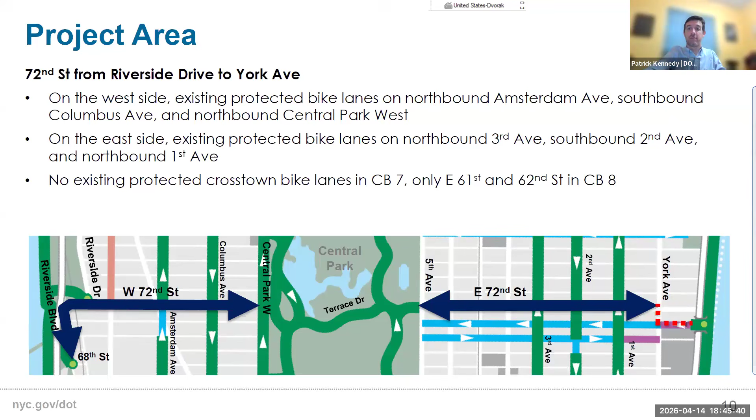Looking specifically at the west side, this is the part of 72nd we'll be talking about tonight. Some of you may have already noticed, but this proposal also includes a bit of Riverside Boulevard down to West 68th Street, as well as the entirety of West 72nd Street.

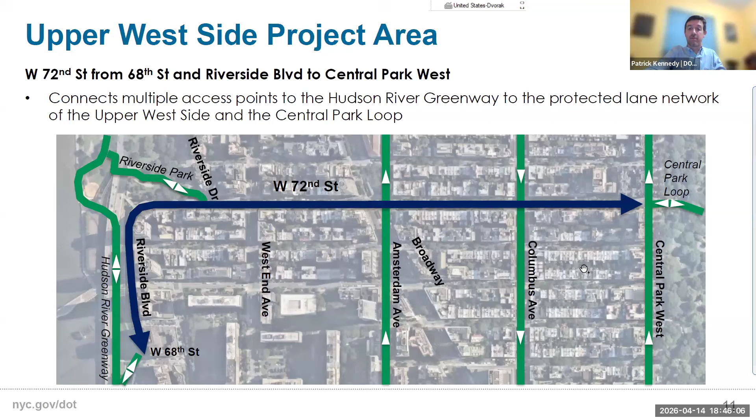Moving to existing conditions: shifting to West 72nd specifically, this street links cyclists from the Hudson River Greenway to Central Park and the Upper West Side. We have existing north-south protected bike lanes on Amsterdam Avenue, Columbus Avenue, and Central Park West. There's also a fair amount of commercial activity and double parking on much of the corridor.

The street is a two-way, 60-foot wide street with 2 lanes in each direction, and parking on both sides. There are 3 bus lines on the street—mostly the M72, but the M5 and M57 run on a couple of blocks on the western end. We have loading and drop-off needs distributed throughout the corridor, with both residential and commercial needs making up that loading and curbside access demand.

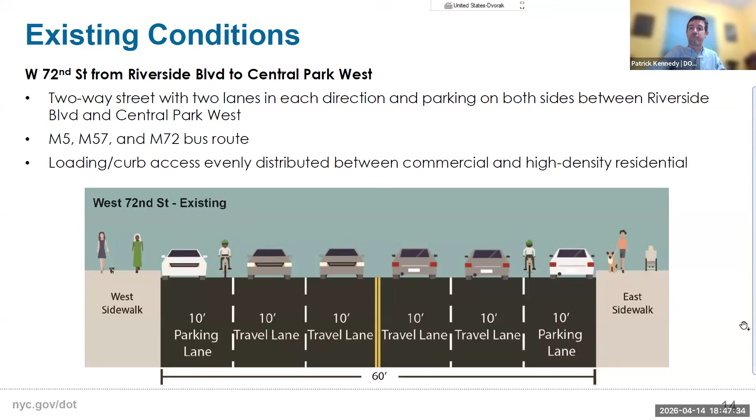On Riverside Boulevard, the smaller part of this proposal, it's a narrower street, about 44 feet wide, 1 lane in each direction, parking on both sides, flush median in the middle. It connects to Riverside Park, from Riverside Park to 68th Street, going down via a ramp to Riverside Park in the Greenway, with high density residential on the east side of the street.

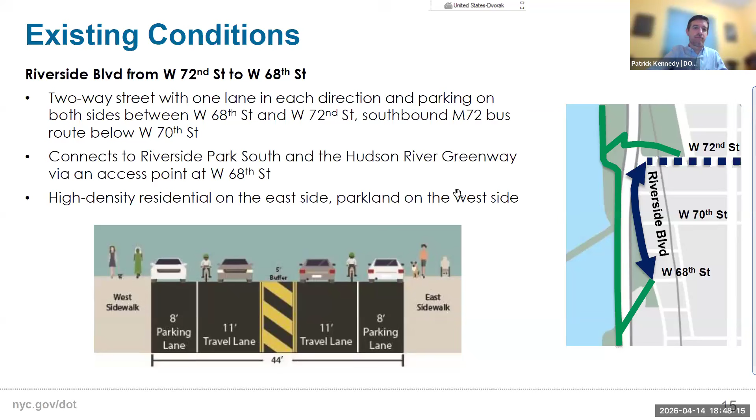So moving to the proposal.

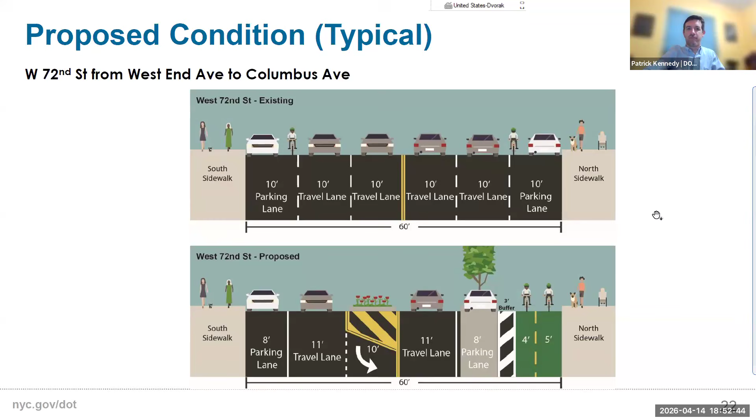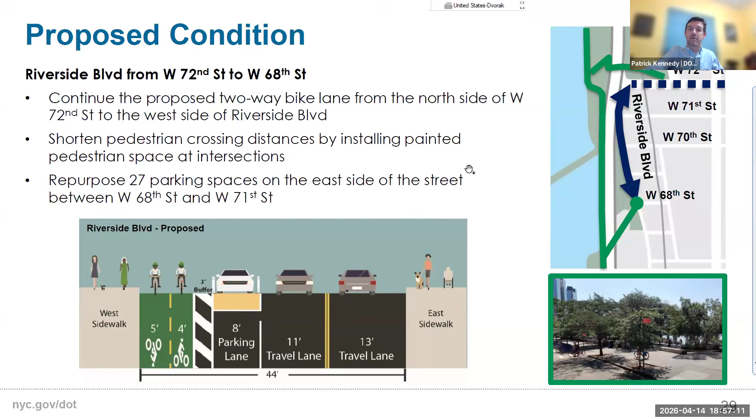And here's what that design looks like on the existing and proposed: a 2-way lane on the west, floating parking, pedestrian space, and then retaining the 2 directions of travel.

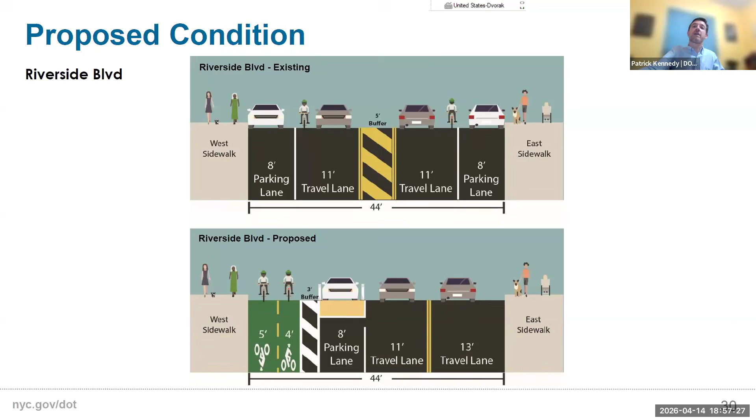So now on to making it work.

As I said earlier, we have enough capacity on the roadway to remove 1 lane in each direction. There's actually not a whole lot of volume on West 72nd, but something that we'll have to contend with and account for is the frequent double parking that we've observed on 72nd Street.

So something that we did in advance was use our public engagement team to talk to people on 72nd about how they use the street. We talked to a total of 89 businesses and got decent participation in a survey, about 70. And we learned what shouldn't surprise most people.

We learned that there are a lot of deliveries happening on the street, both inbound and outbound. People are getting deliveries, and they're also sending them out. Also, most people observed frequent double parking on the corridor.

We also visited residences, mostly talking to building staff. We did a survey, didn't really get great participation, but we had conversations with people and were able to confirm a lot of similar parking needs. This would be more for building services, utilities, deliveries, or for-hire vehicles. So different purpose, but same need for curb access and turnover.

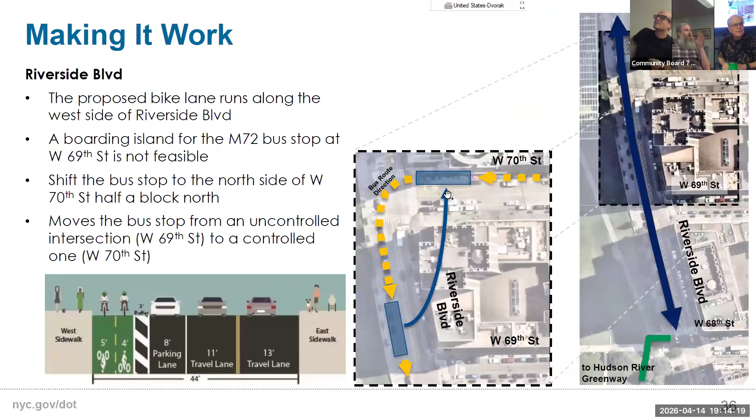Jay, is it possible to get one of the slides? Ask Patrick to come back up. Which one, number 26? Can you put up number 26? I apologize, it's for my own short memory, I want to make sure I'm seeing it. Is it sharing now? Yes, 26 you say? Yeah, I believe it. Nope, it was the one that showed all six lanes, the proposed six lanes. This one? No, it was a rendering. Yeah, that'll do it. Sorry. This one or no? Yes, that's it.

Just a couple, you answered some of my questions. I had noted several organizations, institutions, advocacy groups, business groups, that I would have expected you to have consulted about this, and you did a fairly comprehensive job, so that question goes down the tubes.

I guess my question is, can you paint a more detailed picture of what the traffic flow is likely to look like with one travel lane in each direction, fair, consistent double parking activity, where personally I don't think signage is going to be the answer. I envision one travel lane with double parking occurring on a regular basis, with bus traffic in that lane. In essence, it sounds like a simplistic question, but where does the traffic go under those circumstances? Or, as it is often on 96th Street, it goes nowhere.

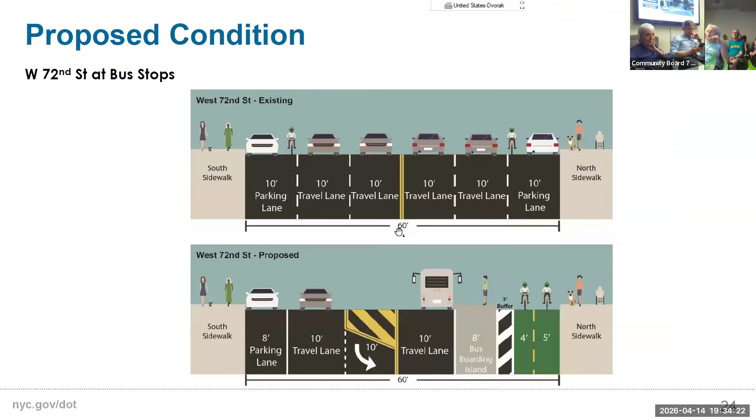So I'm going to turn this into a question. My question is how you have accounted for the fact that cyclists who want to go into the park and don't want to go south, but rather go north or into the park - how are you going to keep them from careening across and going on that pedestrian path, particularly in the next two years when they can't even enter at 79th Street? I think it's a good solution for southbound cyclists, but I haven't heard anything about how you are accounting for northbound cyclists.

And just so I understand, you're talking about at Riverside Drive, the path that goes through the park. I think what you're pointing to looks like this shared path. It's not that wide. There's a dog run just right over there.

Yeah, so with that, I mean, we probably - people who are headed north will continue to take that path through the park. It's an existing path. It's the current way that people get to and from 72nd Street for the most part.

We're hoping that even with the less direct route, just the fact that it's not as steep a hill for people, that they will start to prioritize or favor the entrance at 68th Street. But we believe both entrances have their purpose, and we're trying to encourage people to go to 68th Street, though there is an existing entrance at Riverside Drive that would still be maintained. It would still be there.

If I could just have one quick follow-up question. We're already over, that's all, ten minutes over. I'm so sorry. We can do it during comments discussion then. Okay, thank you. We have one person online, board member Barbara. Did you want to ask anything? I think we're already over.

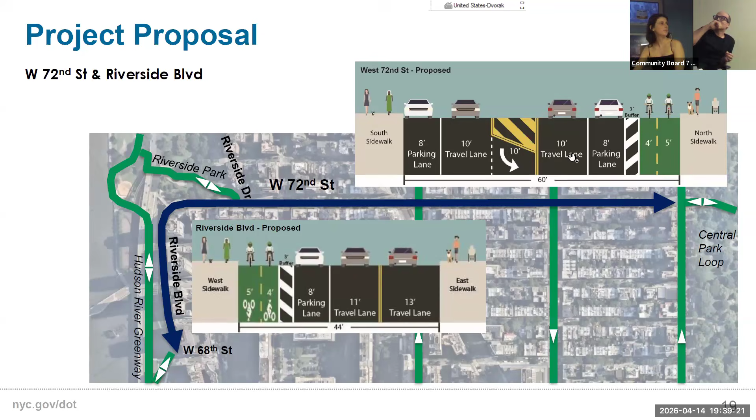Lester Wasserman, Tip Top Shoes, Tip Top Kids, West NYC, live on 72nd Street. I own a building on 72nd Street. Every day we get FedEx and UPS. Those deliveries take approximately 40 to 60 minutes apiece. They come in the morning twice, they come in the evening twice. That's 4 hours a day that one lane is completely blocked. That's just my store. I have a gentleman here from Acker Merrall - I'm sure he's in a similar situation. One lane turns into no lanes very, very fast. If God forbid I were to suffer a medical emergency, or one of these seniors, how would an ambulance possibly navigate this to get through to save a life? We are totally stifling and bottlenecking 72nd Street, turning what was a main street into a non-issue. I don't know how this is even a thought, because the ramifications could potentially be deadly. We're talking about seniors getting education, but no one's talking about the e-bikes and the delivery guys that are reckless, that just fly through. Time's up.

Hi, my name's Cliff. I work at Acker Wines. We've been on 72nd Street since '86. I've been there since '96. I've seen this neighborhood change, I've seen everything go. We handle 500 to 1,000 cases of wine in and out of our doors every single week. We have 5 full-time delivery drivers - if we can't make deliveries, they all lose their job. At this point, this is so negative toward business and toward people who've been pillars in the community. We've made so many donations to local schools and everything else. This is going to force us to move. This is not even palatable for us. We've been here since before most of you guys, so I don't know what you're thinking about. There's not a single voice for the community and the business on this committee, and we're the ones bringing all the people to the street. We're the largest wine auction house in the world - we have offices in Hong Kong, London, and Switzerland, and customers who come to our one showroom in the entire world on 72nd Street. This is going to eliminate all of that. Thank you.

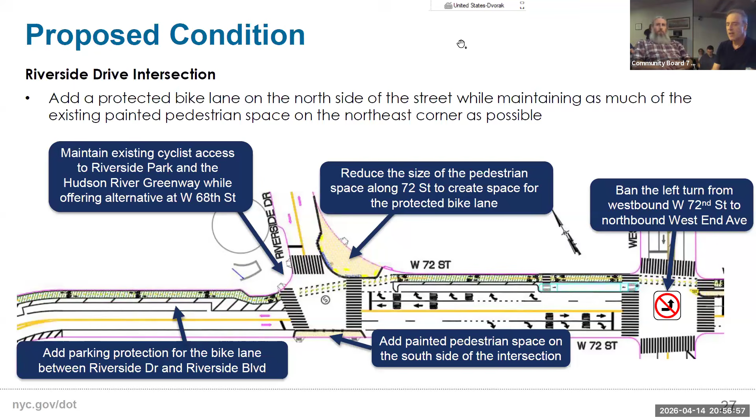Last night I attended the Public Safety Committee, and we spent almost the whole evening talking about identifying bikers so they could be held liable. My point last night is a much better situation is to not have the accidents, the crashes, the injuries in the first place. That's why I'm delighted the DOT came to us with this, because there are only two places: the street and the sidewalk. That's it. If there's not safe biking in the street, they will be on the sidewalk. It's a guarantee. If you don't want bikes on the sidewalk, put them in the street.

I'm a biker, a driver, and a pedestrian. If I feel unsafe on the street, I would go onto the sidewalk, true admission. The point is that by making a safe, dedicated space for bikers in the street, you're going to get them away from the pedestrians. If you treat people like outlaws, they're going to act like outlaws. So it's important to have a dedicated space for bikers. That's my main point, plus a couple of small points.

Loading zones: for business it's absolutely essential to have loading zones. We have such a shortage of them here. I urge the DOT, I know the plan hasn't been fully fleshed out on this, to put in as many loading zones as possible. It's pro-business and pro-safety. People talked about ambulances - ambulances can fit through the bike lane and bikes can get out of the way in seconds. Arguably it makes it safer and easier for ambulances in a true emergency to get where they need to go.

Elizabeth mentioned crosstown connections. Fully crosstown would be great, but even if the east side doesn't happen, Riverside Park - I think that's the most used bike lane, the one along the Hudson - this would provide a connection to the most important park in the city, which, when you're on the drive, gives you access to the Upper East Side and to Midtown.